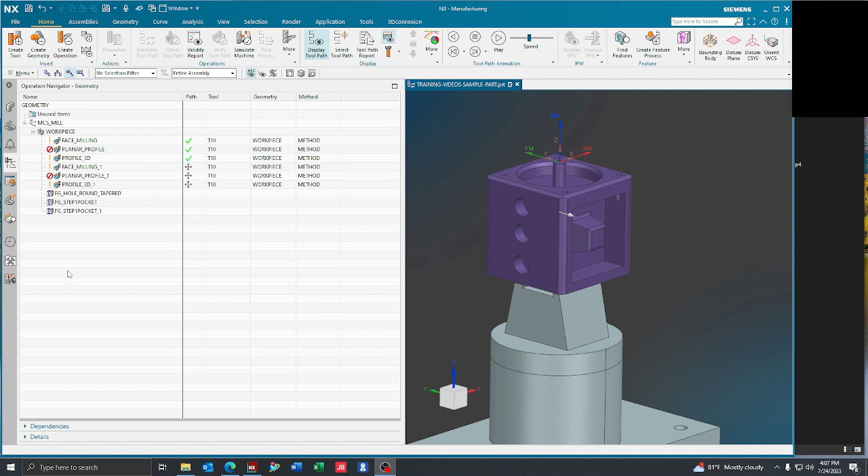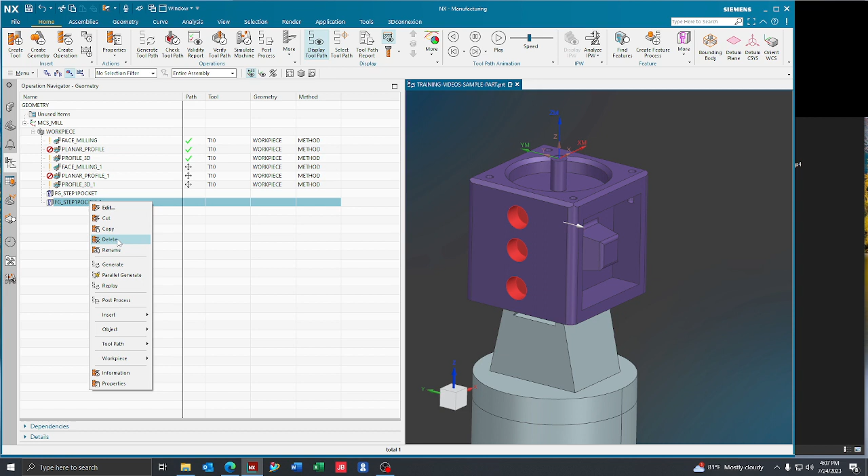In this instance, we found one hole on the top here, 4 on the top there, and then 3 on the side. So this one on the top, we're going to go ahead and delete that because we're not going to worry about drilling that hole. These 3 on the side, they're 3/4 with a flat bottom. We're not going to worry about those either. We'll probably ramp them or hole mill them with an end mill. So we'll delete those. So we're left with this one section.

Now you might have a part that has a dozen different hole sizes. So you'd have a bunch of these left over. A good habit is to hover over the wording here, and then it's going to tell you your diameter, which you'll see is 250. So I like to take this and type in 250.

Now, the reason I did not put a point in front of that is NX does not like decimals in names, and you'll see it's going to give me an error. So I'm going to name that 250 for 0.250 diameter holes. Since this group is under my workpiece with my MCS, I can program with it.

So we'll go ahead back to the program order view, and I'm going to say create operation. I'm going to go ahead to hole making, and I will select the spot drilling with my 1/4" drill here. And for the program folder, I'm going to put it in my op1. But for geometry, I'm going to select my 250 that you see here now for my 1/4" holes.

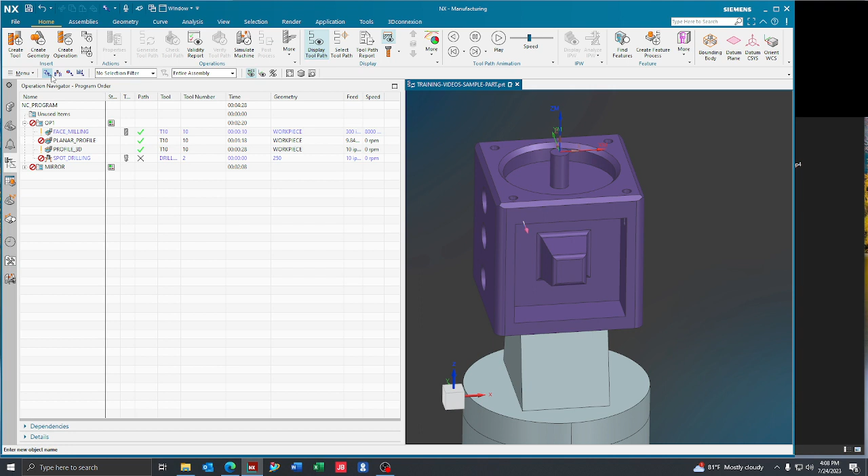If I go ahead and say OK, and I'm just going to quickly go ahead and say OK again, we can then pop back to our geometry view, and you can see that the toolpath is underneath that 1/4" hole group. Going back to our programming view, we can double click on the toolpath to open it up, and then if we click specify feature geometry, you can see that it already has those holes selected. So then we can actually go ahead and just hit generate, and you can see that there's the holes drilled.

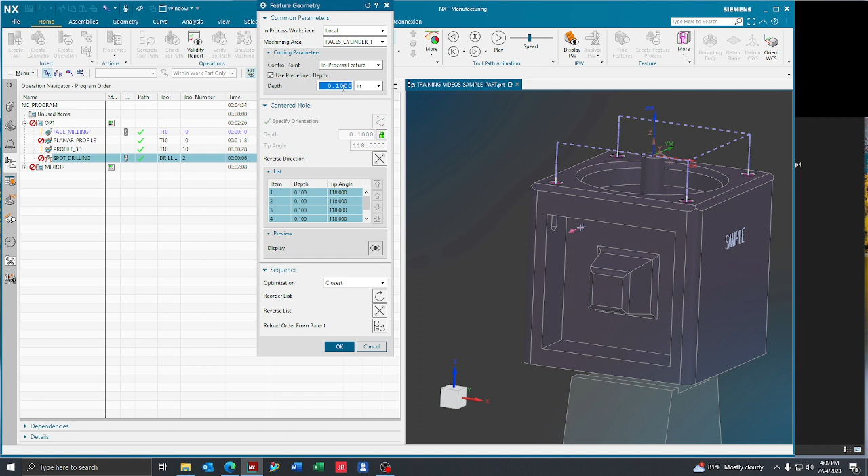Now the depth is not correct, but we remember that it was a 1" depth, so we can say specify feature geometry again. At the top here, use our predefined depth. We can make that 1". It's going to change our depth right here to all be exactly the same 1". And then we can say OK and drill again, and then say OK. And now, very quickly, without having to select any holes, you can see that you have drilled your 4 1/4" holes that you found.